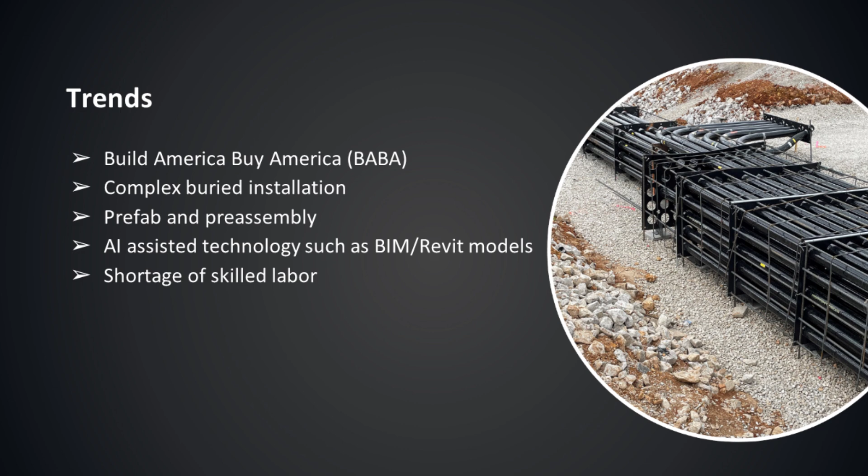So trying to work to get people from the mainland over to Hawaii, or looking at products that can save labor. Being that they're on an island, obviously it is harder to find that skilled labor, but that problem isn't specific to just Hawaii - it's all over the United States. You talk to any electrical contractor, and it's really how do we keep and retain our skilled labor, even though, of course, being in the electrical world is a great career opportunity.

So what type of conduit is generally used in data center construction? You're looking at really 4 different types. You're looking at GRC, or galvanized rigid conduit - that would be for areas of heavy soil compaction. PVC coated is going to be used in areas of heavy soil compaction as well, but also might be used in areas with corrosive soil.

You see a lot of people, especially in the Southwest, having to tape their GRC elbows with non-corrosive tape so they don't rust out. So they might say, well, we'll use a PVC coated elbow, and that might help mitigate the issue. Schedule 40, Schedule 80, EB duct - that clearly has been a choice for a very long time for large scale commercial jobs for duct banks and underground work.

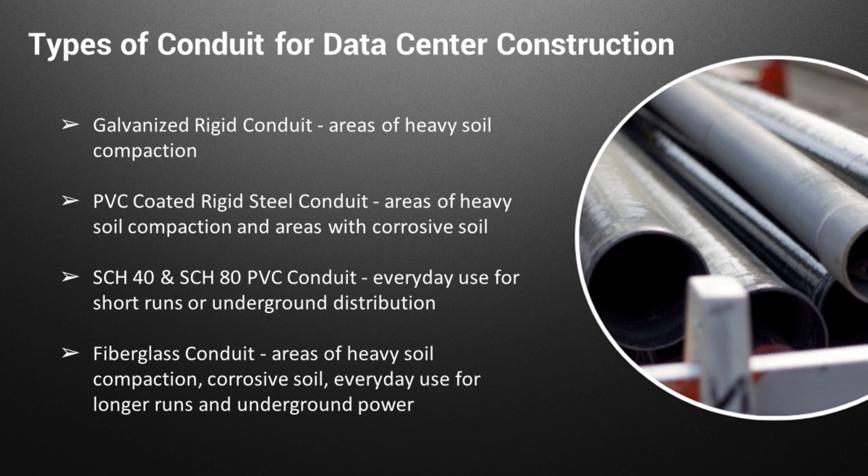Really, again, everyday use for short runs or underground distribution, both on the power side for commercial and industrial applications, but also on the utility side. Where we come in, and fiberglass in general comes in, is depending upon the wall thickness, fiberglass can actually be used in areas of heavy soil compaction. We're highly corrosion resistant and non-metallic, so it makes sense that we can be used in corrosive soil, and of course for everyday use for longer runs and underground power.

So what type of challenges are people facing that we're hearing out in the field? One, of course, is elbow burn through, and what do people have to do to mitigate that effort? With elbow burn through, that happens when you're pulling a pull rope through a PVC 90. If the tension increases and the heat of that rope increases enough, it will literally saw through the inside edge of that elbow. That's a huge drag if it's direct buried, because generally that rope is coming right through the ground. You can see it quake up, and your cable has been compromised.

But it's even worse when it happens in concrete encased applications. Obviously, you're jackhammering up a ton of concrete to replace that elbow. I had a utility that I was talking to at the Lineman's Rodeo a couple weeks back tell me that every time that happens, it's at least $8 to $10 grand for a jack up and a re-pour of that concrete. I would say that's a pretty conservative estimate, because they're talking about perhaps a few elbows in a utility style basement application. You can only imagine what that is for a data center that has hundreds of thousands of elbows if you're burning through quite a bit of them.

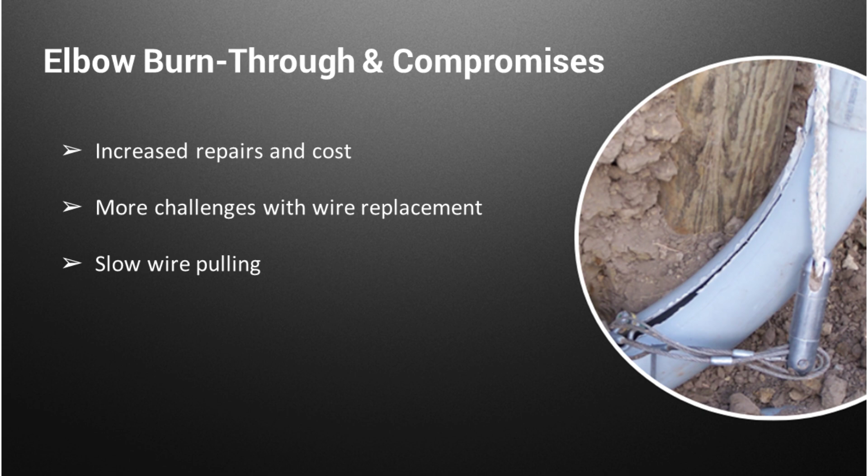So it makes it difficult with trying to replace that wire. It slows you down. You have to pull slower, and sometimes pulling slower isn't enough. The weight of the cable and the heat on that rope can be just enough to saw through it.

Cable faulting is, of course, another concern. Nobody wants a cable fault. Obviously, electrical contractors, cable manufacturers, everybody involved does absolutely everything possible to make sure that these incidences don't happen, but they do happen from time to time.

So what happens when a cable faults? Well, if a cable faults inside of PVC conduit, it actually melts to the wall of the PVC conduit, which means that it's really not going to be able to move out of the conduit to be able to reconductor. If it happens in metallic conduit, it's going to weld to that conduit. It's highly inconvenient. So, if that happens, really, what's going to happen?

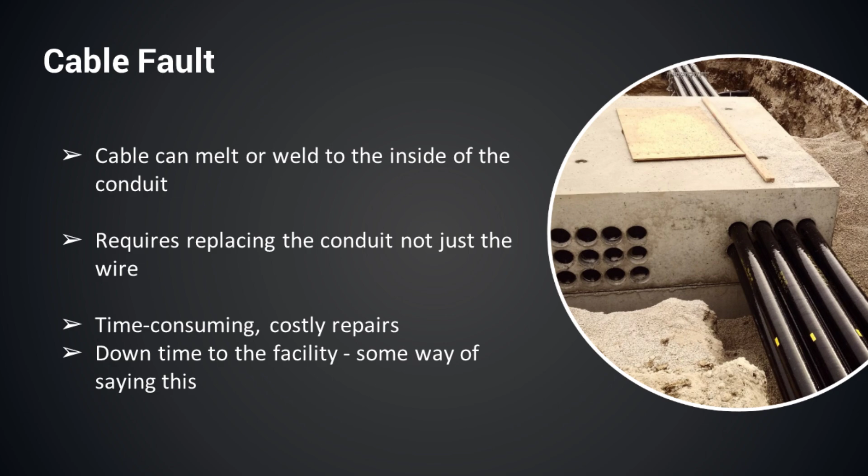Well, if it's concrete encased, you're jackhammering it up, you're cutting out a section of the conduit where the cable is melted or welded to the inside, you're monkeying around with split duct or whatever, repairs are available. It's a real pain in the neck. It's highly time consuming. It's extremely costly. You've got downtime. It's just not a good deal to have those.

So, let's dive in a little bit more. I know I talked about space requirements with complex buried installation, but we want to talk about maybe some aspects of installing other types of conduits that complicates or adds costly effort.

PVC, being that it's put into concrete and is a welded together product, you have to use a joining technique like gluing and using that PVC weld. That has the potential to add quite a bit of installation time. You talk to any electrical contractor, utility, you will seldom talk to anybody in the field who hasn't accidentally kicked over a can of PVC weld. So what do you do? Well, you just made a mess. Your boots are probably stained purple or blue now, and you got to go find a different can. It can be a real pain.

Same with threading together conduit as well. That can be quite cumbersome. Heavy conduit is another thing. If you're looking at steel, generally a 10-foot piece of steel is going to weigh roughly 100 pounds. Even PVC Schedule 40, you're looking at weight that's going to be about 2.3 pounds per foot, 3.2 pounds per foot for Schedule 80 as well. So it gets heavy and cumbersome.

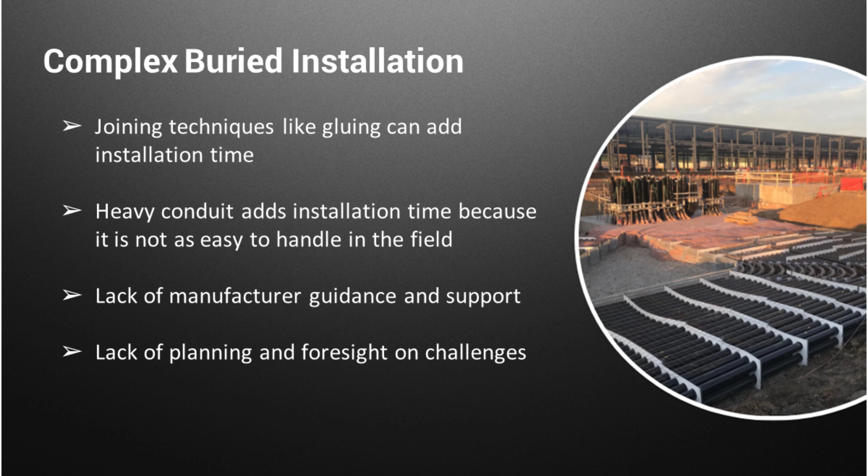And then lack of planning and foresight on challenges. A lot of these products or projects are planned out years in advance, but material shortages, supply chain issues, variances, permitting, all of these things can really cause a herky-jerky start, and it might be difficult to get the materials that you need in time, or you're subbing out for a different material to keep the project on track. It's just kind of the way of the world with how these projects work, because they're so large and require so much permitting and variances.

Materials and installation cost. Going back to supply shortages, we saw PVC skyrocket in price back in 2020 and 2021, going up 800 to 900%. Steel, of course, can be volatile depending on what's happening. We've got tariffs that might be coming in. There's just so many different variables that happen with different types of commodities.

We talked about the longer installation and larger costs due to joining techniques and weight. We're really going to unpack that a little bit later in this presentation when we talk about the NECA manual of labor units, which I find very helpful, really just to compare the different conduit types and how that all plays out.

There are folks that still aren't prefabbing their duct banks and pre-assembling their risers and stand-ups. I'm seeing the contractors that are doing that prefab ahead of time, they're really the ones getting ahead. Being able to do that in a prefab application, especially for duct banks, lifting 40 feet of conduit, setting it on a flatbed and then craning it off, putting it on the side of a duct bank - that's huge if you can do that and eliminate time in the trench.

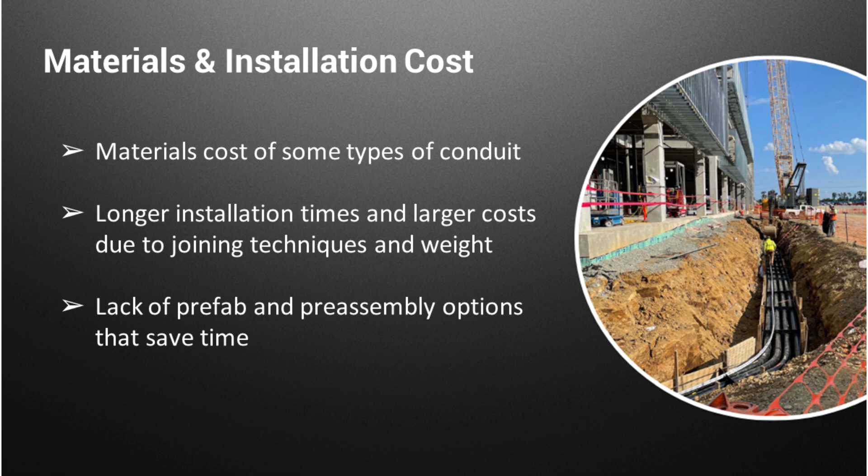Not only is it faster and cheaper, but just circling back to safety, that time in the trench, if you can reduce that, really reduces chances for injury.

So we'll talk about a couple data center projects that we've done at Champion that I think are pretty interesting and enlightening. I really think that they speak to the value of our product and what fiberglass can offer that's really different than the metallic or plastic conduit types that folks may be used to using.

The first one we'll talk about is a data center that we did in the Midwest. This was really our first, what we call in our office, a PVC conversion. So 3 to 4 years ago, we were looking at PVC going up 800 to 900%, like I said, and fiberglass was in a very unique position. We were finally less expensive than PVC, really for the first time since fiberglass existed in the conduit space.

What that illuminated, though, from a price standpoint, was the labor savings. We'll talk about that in the next slide, but I just want to tee you up because it's extremely exciting. This is really what opened our eyes to the opportunities that we could offer to our contractors and the engineers.

So what was this contractor and end user facing? Well, we talked about PVC - not only did the price go up, but you really couldn't get it. Lead times were horrific, and you were seeing people beg and plead for material everywhere, and that's when a lot of people were coming and knocking at our door.

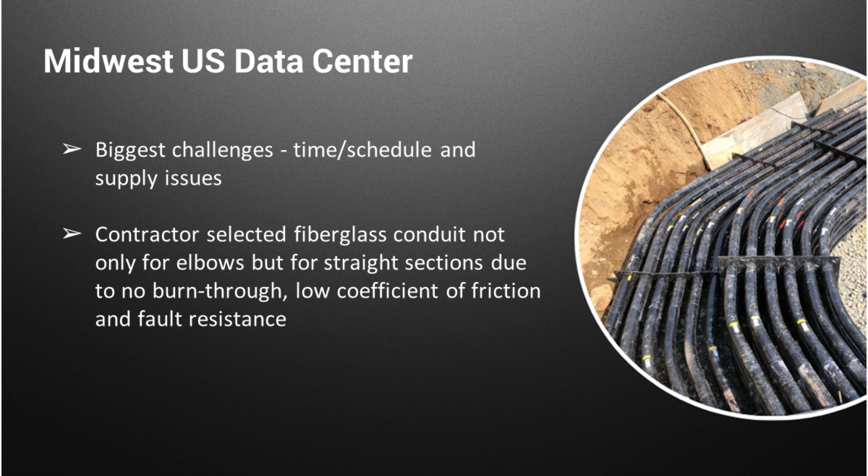But they also used our straight sections because we have a very low coefficient of friction, significantly lower than PVC and steel, which is hugely attractive for cable pulling, a reduction of chances for fault. So that's why they picked us.

But what did they find? Well, it scared us and made us very excited at the same time. They told us that their rule of thumb is they could install about 3 miles of conduit in about 5 working days, or in a week, and they were using our 4-inch conduit. Well, a little over 15,000 feet is what we can fit on a flatbed of our 4-inch conduit. So we said, we'll send you a truck a week, no problem, keep you fed. That'll meet the pace, because we figured at this point, like, hey, they've never used it before - we didn't really know how much faster it would be.

Well, we sent it up to the contractor. I believe it was on a Monday. I think it arrived there.

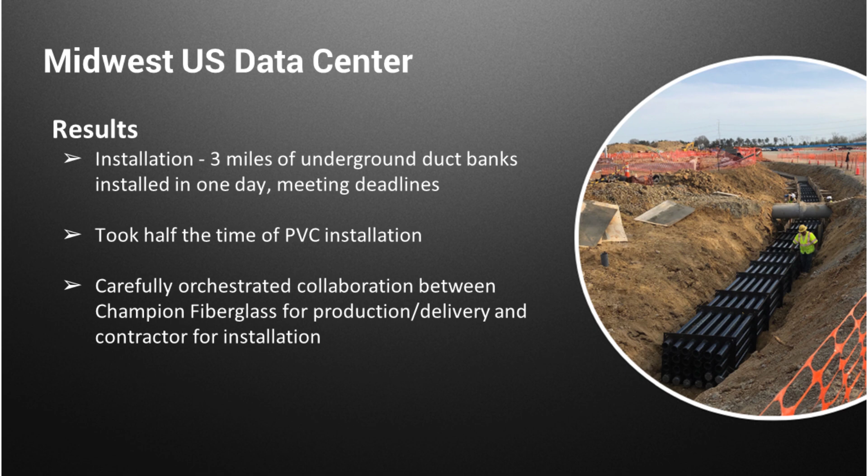So why did this all work out so well? Well, we really worked well with the contractor to keep them fed. We made sure it was an effective partnership with them and that delivery was consistent. They weren't ever waiting for anything.

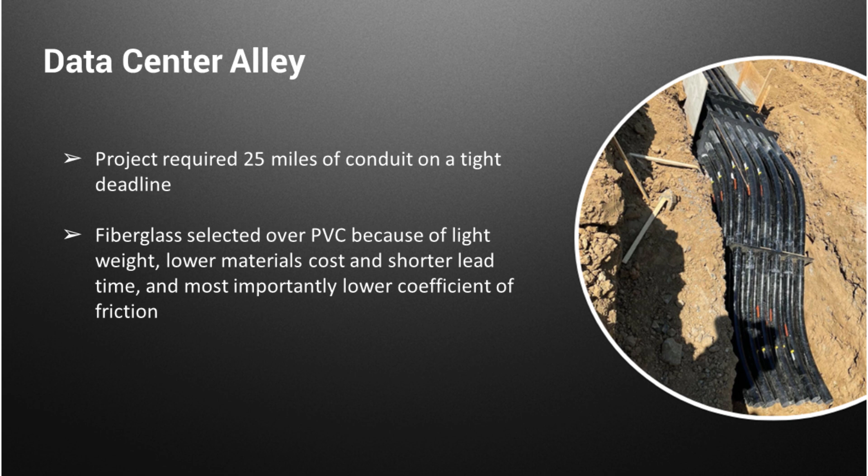Another project we did, which I believe is in a case study on our website, was in Data Center Alley - the colloquial name for that giant area right outside of Washington, D.C. If you ever get the chance to go west of DC, that whole area is just filled with data centers. It's crazy how many there are. This was another instance where PVC was having supply chain issues acquiring it. It required 25 miles of conduit on a tight deadline, so fiberglass was again selected for the same reasons as the Midwest data center contractor.

So what happened with them? What they really told us is 2 things. They were able to prefab our conduit much easier because our product is 1/3 of the weight of Schedule 40 PVC. We also have a glueless system that allowed them to put it together without having to use any adhesive, that's concrete tight and watertight. The weight made it easier to put together, but also imagine craning those duct banks in - if you're putting together conduit that's 1/3 of the weight of what you're normally using, it's a lot easier to maneuver. Those 2 items, they said, really helped them achieve vast cost savings.

The labor they saved on the job was 60%, which is massive, and they had a 63% increase in productivity over PVC. We really couldn't have been happier with the results they shared with us, and it reconfirmed what we'd been hearing from prior customers as well. The beautiful thing is these 2 customers specifically have been repeat customers since then. We really know and firmly believe we're providing a product and service to these ECs that will help them be competitive in the marketplace.

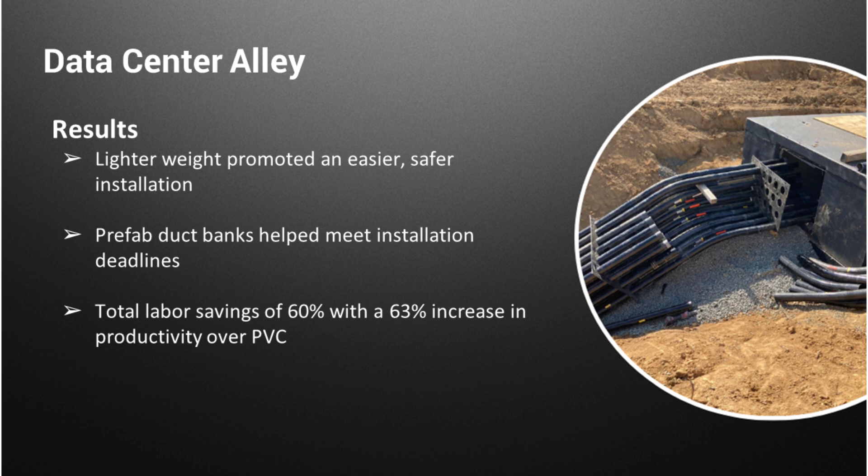So why use fiberglass? We'll talk in general about fiberglass, not just Champion. We talked about no burn-through elbows - that's the low-hanging fruit in this product line by far.

Being that it's lighter, it reduces the chance of injury, whether from elbows or conduit - God forbid they fall or roll on you. It's a very different situation having a very light piece of fiberglass come on top of you than a piece of PVC or, of course, a steel elbow. That's the difference between somebody being very irritated with their coworker and somebody being very severely injured or potentially dying, which we do not want happening.

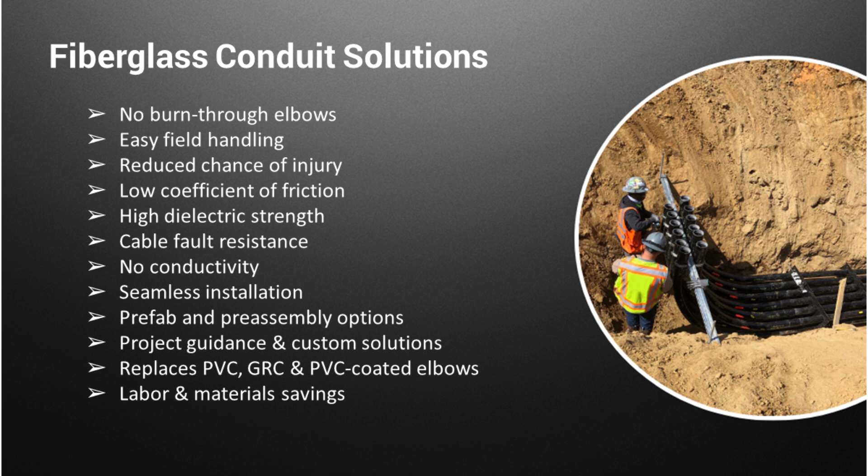And then, of course, labor and material savings. That's the beauty of this product - you don't have to give up anything to use fiberglass. You actually get all these other features and benefits, and you get to save a ton of time and money. That's huge. When everything else is going up in cost, you're looking at a product that's quite price stable, with a much lower installation cost and time to install.

So why is that? Is this all in my imagination? Well, no. Why do we know this beyond just contractor feedback? We can actually reflect on this in the NECA manual of labor units. Some of you listening might be NECA members yourselves - you can go in that manual right now.

What we did is we actually compiled all of the conduit types in this chart, rather than having to look through every page to see what is the true time to install our type of conduit versus everybody else's. A couple things to note: this metric is based off of 100 feet of conduit being installed at chest height, so this isn't below grade installation, which most people would say would take slightly less time.

But if you look at fiberglass, we're less time to install at any size of conduit comparable to stainless steel, galvanized rigid, and PVC coated. Even if you look at Schedule 40, we were astounded - albeit 3/4 and 1 inch were more time to install, we were equal to or less than the time to install by 10-foot sticks from inch-and-a-quarter and above.

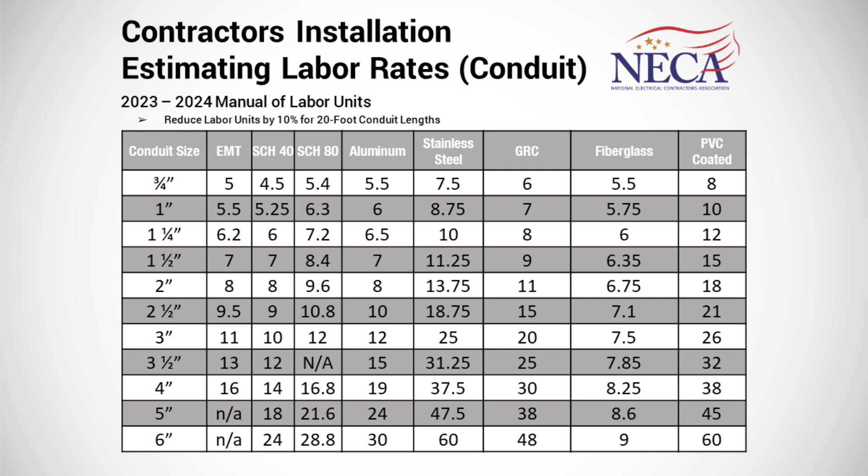And we know that you can reduce labor units by 10% for 20-foot conduit lengths. Well, most people install fiberglass in 20-foot lengths because it's so lightweight. So you can take that number, multiply it by 0.90, and that factor is going to go down even more.

Similarly, it follows suit for elbows. More importantly, the true value of using a fiberglass elbow and labor savings is seen when you're using long radius sweeps. You can see when you're looking at GRC Schedule 40, Schedule 80, and PVC coated, you actually add 20% to that labor when you're using a long sweep elbow. For fiberglass, that isn't the case because of our weight.

I can tell you there's a beautiful slide in our Lunch and Learn - if you'd ever like to see it, hit me up after the presentation - of an individual in our factory holding an 8-inch by 90-degree by 96-inch radius elbow off the factory floor. That elbow weighs 32 pounds. If it was steel, it would weigh over 400 pounds. If it was PVC, you're looking at 100 pounds at least just for Schedule 40. So if you think about it, an elbow of that size, which is absolutely giant, those long radius sweeps are really where that cost savings can be gleaned.

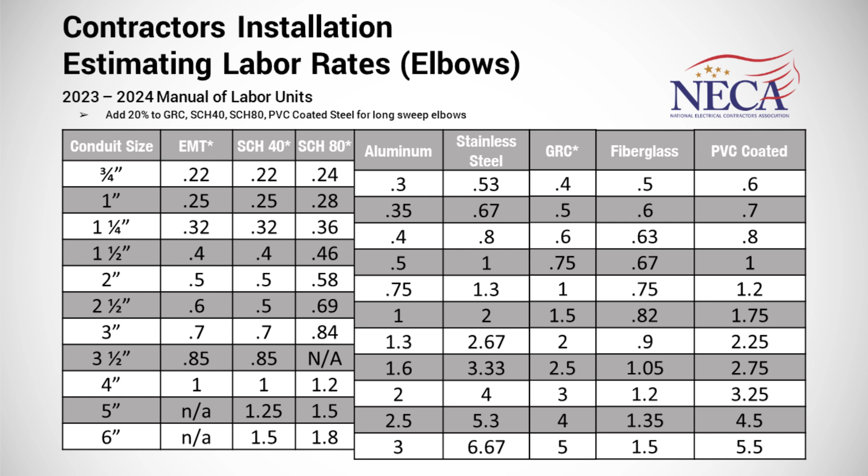So I would encourage you guys to talk to your contractor peers, engineer peers about where you can integrate this innovative product into your projects. Feel free, of course, to reach out to us at Champion. We love being partners with our contractors. We're very big on making sure that we have long-term partnerships with our contractors and filling in those needs where you might need something that's custom or a little bit more off the wall.